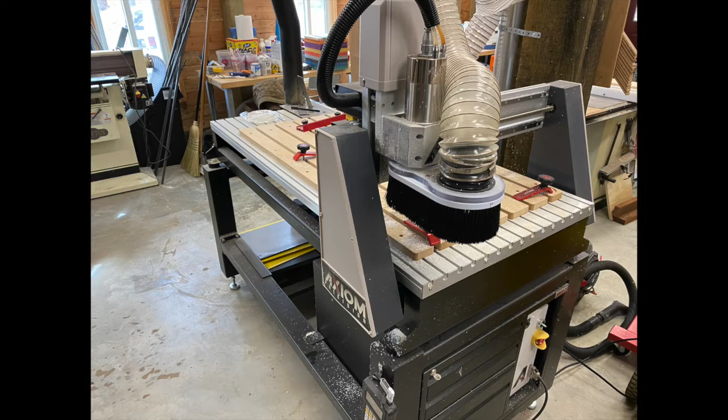The first thing to realize is that panels such as these are carved using a CNC router. They are not carved by hand. These machines are becoming common in woodworking shops and are found in most maker spaces. Even if you don't own a CNC router yourself, you can usually find access to one. I live in a very rural area, and even here I know of 3 other CNC routers besides my own within 20 miles of where I live.

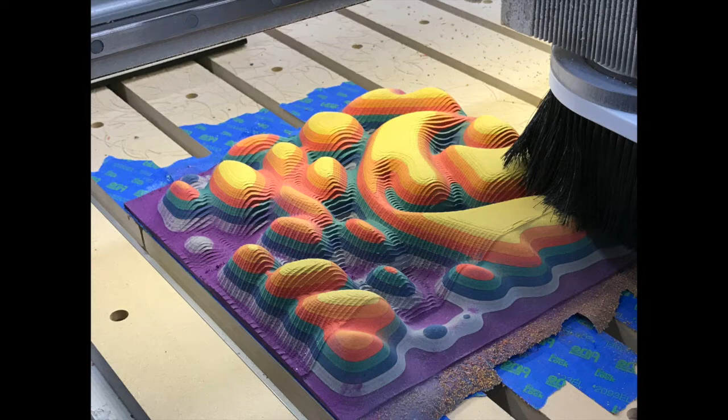First, let's talk about the possible types of materials for these kinds of laminated panels. To achieve interesting designs, you need to use a build-up lamination with some kind of contrast between each layer. The materials that I've experimented with for these types of panels are plywood, both standard and Baltic birch, solid wood using contrasting types of wood in each layer, colored MDF sheets, and colored expanded PVC sheets.

Laminations of plywood have the huge advantages of cost and availability. If you are just giving this technique a try, I strongly recommend learning and making your mistakes using plywood before you invest in the other options. The other material choices are not cheap, and the process can require many hours of cutting on a CNC router.

When using plywood, you are taking advantage of the glue lines and different orientation of the layers to give you the contrast that makes these panels pop. Because of voids in the layers and the softwoods used to make the plies, the resulting panels made from these laminations have a rustic quality.

Baltic birch plywood is made with very thin, uniform plies and has a void-free core, so your panels will have a very different appearance than if you use standard plywood. Depending on where you live, you might have to buy it online, and it is much more expensive than regular plywood. Rockler Woodworking is one online source.

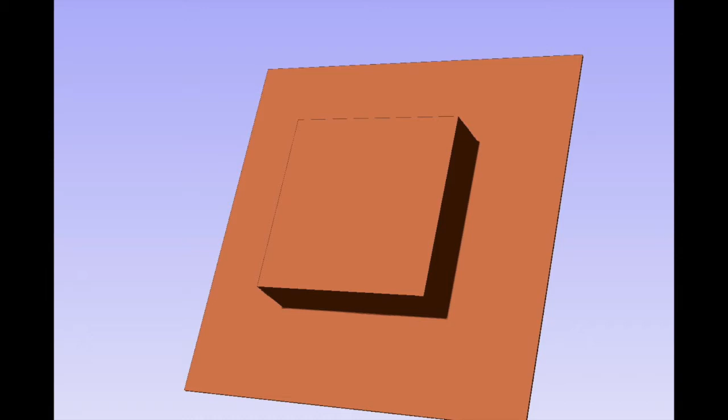If you had an image that consisted of just black and white areas, after machining, the edges between these areas would be interpreted as being vertical. In order to have smooth transition between these areas, which you'll need for the type of wave patterns I'm discussing, you need to have a gradation of gray between them.

So the technique that I'm using to achieve the gradations that I need is really very simple. I'm starting with a black and white drawing and then applying a blurring filter to the black and white drawing. Now, blurring is a common operation in almost any photo editing software. I happen to be using Affinity Photo, but all photo processing software has a similar capability.

There's a number of different blurring options that you'll be presented with in almost any photo editing software, and the simplest to use and understand is called Gaussian blur. And that's the one I'll be using in the demo that I'm going to be doing in a few minutes. But some of the other blurring techniques can give you very interesting results, such as the motion blur.

So in summary, the workflow that I'm following to create these panels is to first create a black and white drawing, second, to blur the drawing in a photo editing program, third, convert the blurred drawing into CNC instructions using CNC software, and fourth, simply cut the panels on my CNC router.

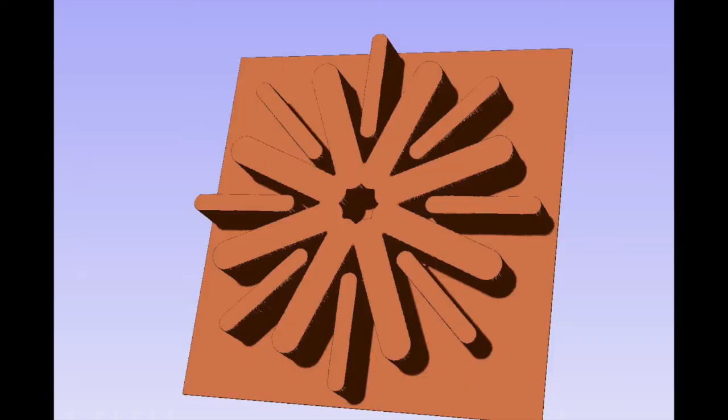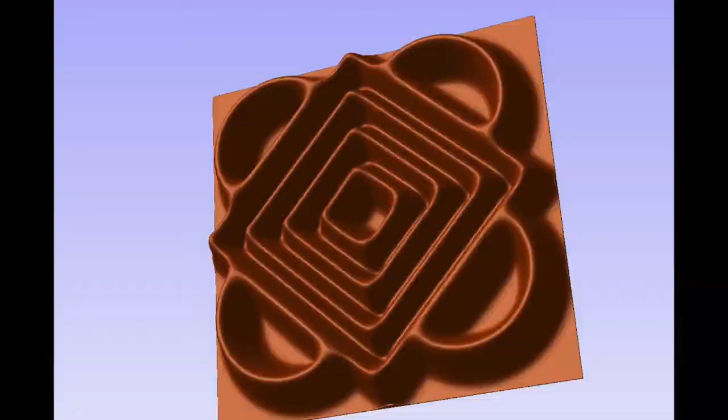Before I get into the demo, here are 4 simple drawings and simulations of the panels each would produce. Unfortunately, the software that I use simulates only a solid color display option. Because the contrasting layers are one of the main visual features of the panels, you'll need to use your imagination a bit. For each of these 4 samples, the sequence of images are: first, the black and white drawing; second, what that drawing would look like when machined; third, the drawing blurred; and finally, what the blurred drawing would look like when machined.

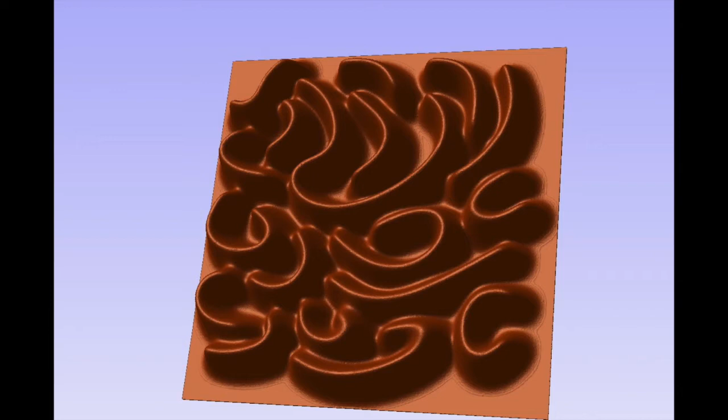When creating the artwork, almost anything you can come up with will work. Having an image that is roughly half black and half white seems to be a good starting point. I use the EazyDraw drawing program, which has a lot of built-in configurable stellate options, as well as the ability to generate stepwise blends between 2 figures. If you need inspiration, just look through one of the Dover Op Art and Geometrical Image collections.

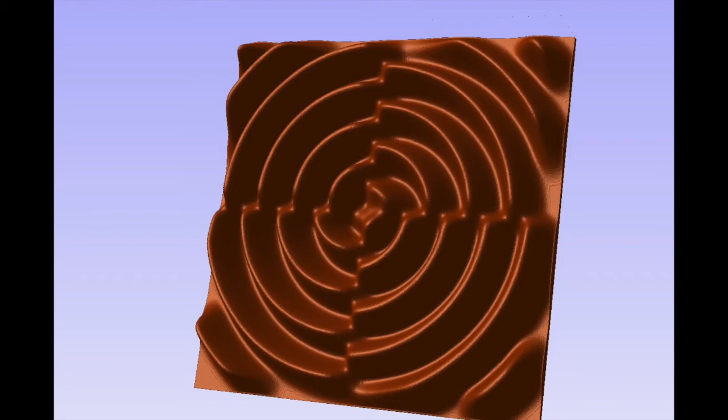Now, the first step in the process is to draw a black and white image of some sort. And this is the image that I originally was going to use. It would have produced a pattern art that would look approximately like what you see here. The problem with this image is that it's very similar to patterns that I've made before, and I wanted to do something a little different.

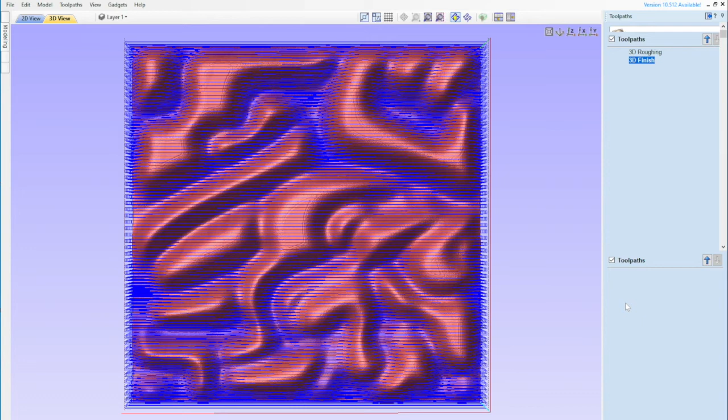Once the tool paths are calculated, I'll preview them to see what they look like, especially in 3D. And that looks kind of interesting to me. I'm going to do it.

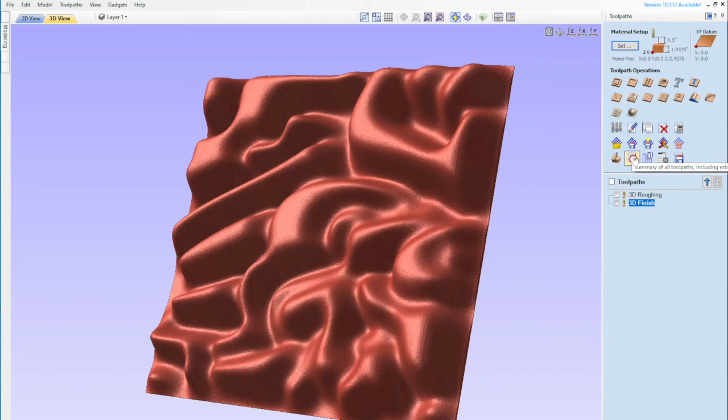So I want to save my tool paths. Before I do that, I'd like to check how long it's going to take to actually cut this particular model. It'll take about 5 hours, which always seems like a lot of time, but it does a nice job.

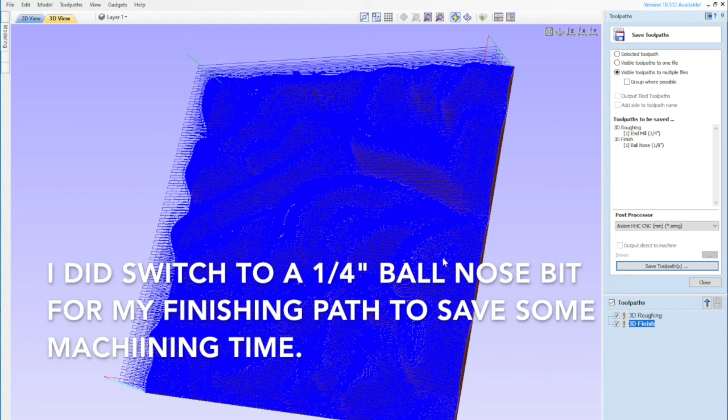So I'm now ready to save my tool paths. I should have had this selected here. Now I have my two tool paths saved. I'm simply going to copy them to a thumb drive, and the next step is just to take them to my CNC router and cut the model.

So here I've loaded up my panel on the CNC router, and it's starting to cut the rough pass with the end mill. I'm taking off about a quarter of an inch in each pass, and since there are about 7 layers, it'll be 7 passes, so it takes quite a while to do this.

Now you'll notice I'm using a hand vacuum to help out - my shop vacuum isn't quite strong enough to do this by itself. I'm going to let this video run for just a little over one pass, then turn it off and show you what the rough pass looks like when it's done.

I don't consider myself an expert of any kind on the CNC router, and I'm always a little dubious of the feed speed and all the speed settings. PVC is actually very easy to cut - it doesn't really chip, it kind of disintegrates. Sometimes if you go too slow, it kind of sticks together. So I'm going fairly fast, but I think I could still run it up a little faster. Maybe next time I give one of these a try, I'll run it a little faster.

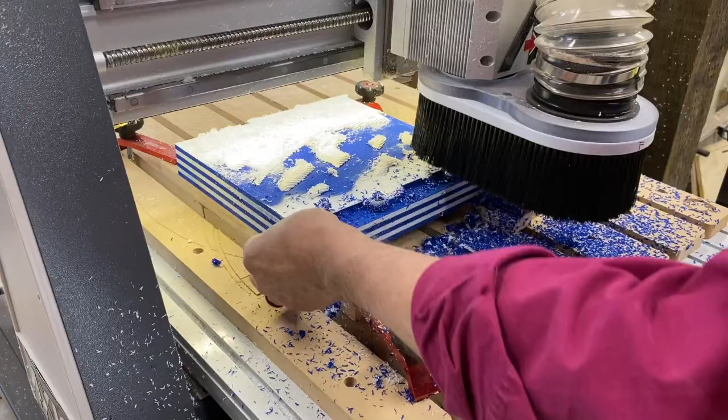So here's the completed panel after the roughing pass. If you look in the far right corner, you'll see a small chip out that I'll probably end up having to repair by hand. This is because I was testing using gluing only on one surface, and I definitely will go back to using gluing on both surfaces.

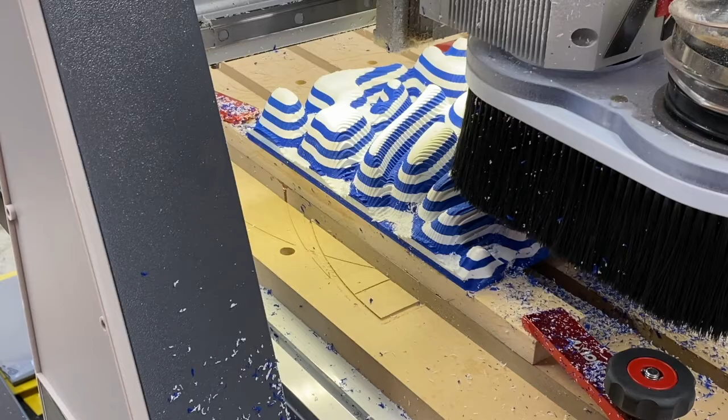So I've switched bits, and now I'm on to the finishing pass. The finishing pass is just one pass over the entire area, but the overlap is very small, so it takes a fair amount of time.